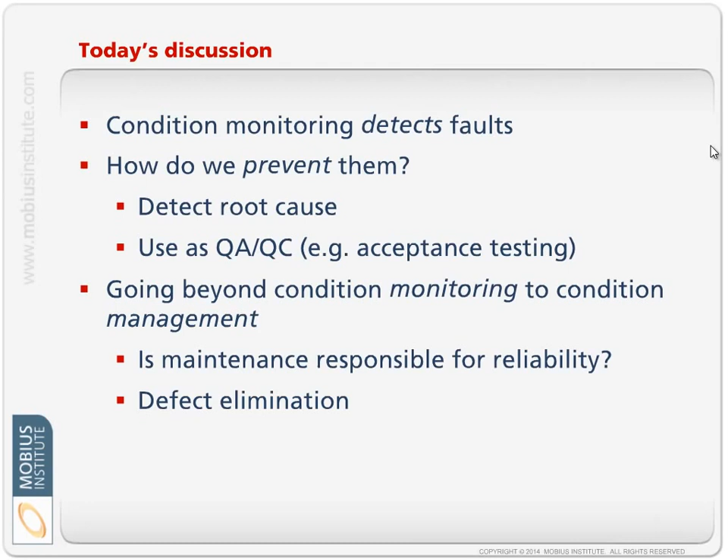In this presentation we're going to quickly summarize condition monitoring and its benefits in its traditional role, and then look at not only detecting faults but how we prevent them in the first place. We'll look at root cause failure analysis, using condition monitoring as a quality assurance and quality control process, and then we'll look at how we go beyond condition monitoring to condition management, and explore the topic of defect elimination.

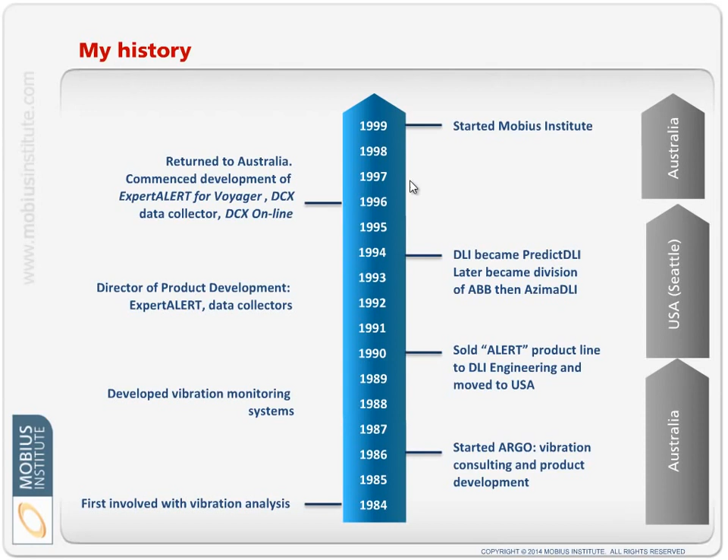Briefly, so you understand where I'm coming from, I've been involved with condition monitoring since 1984, in a variety of roles, from running my own company in Australia to working for a company that developed condition monitoring systems, to starting Mobius Institute, which provides training in condition monitoring. Our business has been going 15 years, and over those years we've developed various training courses related to condition monitoring and reliability improvement. More recently, we've taken our reliability improvement ideas and put them into a product.

The point I'm really trying to make is that over those 30 years, I've seen a lot of companies try to run successful condition monitoring programs, and a lot of companies really struggle to run their condition monitoring program as well as perhaps they should. They're not getting the returns they'd hoped from condition monitoring. We'll explore a couple of those points as we get through this presentation.

The other major observation through this time is that most people really focused on detecting faults and providing a warning that a machine was failing, but not necessarily focusing their attention on the area where they would get the greatest return on investment, and that is eliminating the root causes of those faults that they were detecting with their vibration analysis systems or infrared systems and so on.

There are lots of ways we can do that - traditional vibration analysis, ultrasound, thermography, and others. There are a lot of techniques we can use, and it depends on the type of equipment we're monitoring. In my discussions about condition monitoring, I would include inspections and observations as being an important part of condition monitoring, but some people might consider them just normal maintenance tasks.

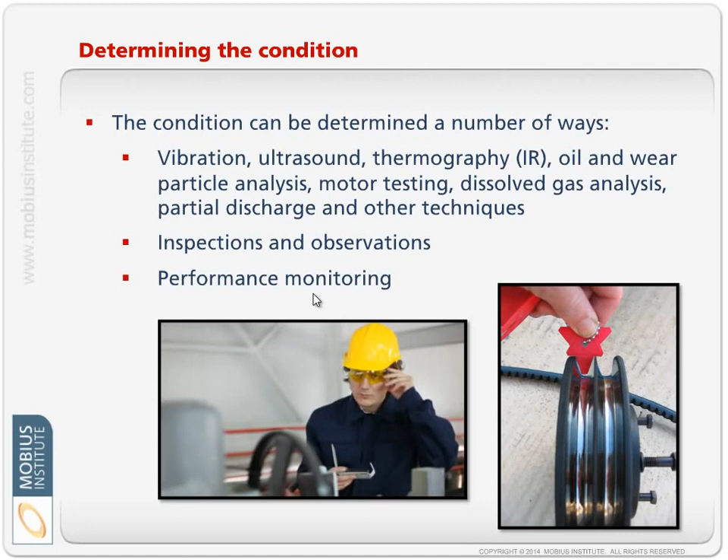But in general, if time is being spent to inspect a piece of equipment to determine its condition and the necessity for maintenance work, corrective actions or whatever, that to me is still basically condition monitoring. We're monitoring the condition so that we can react, and that's a key word here - we react if there's a problem detected. Performance monitoring certainly fits into that - if we can see that the pressure or flow is not adequate, that's a condition that needs to be remedied.

The basic principle behind condition monitoring is that we run for a certain period of time when the equipment is in its normal, healthy state. We could say it's running defect free, but let's just say the defects in the system, the inherent unreliability if I can put it that way, hasn't yet caused any faults to begin to develop.

At a certain point - this y-axis here is condition, and depending on different people's definitions, we might show that the condition has actually degraded a little up until this point. But at a certain point, we can say there is the ability to detect that the condition is degrading and that a fault has developed, albeit minor at that point. From that point on, which we call the P point in the PF interval, we can use these various technologies to detect that there's a problem.

Now, I've put ultrasound first. In some cases it would be the first to detect it if you had the ability to pick up, say, a lubrication problem.

But generally speaking, a bearing becoming loose or becoming hot and making sound, that is a late stage failure. Other technologies are going to pick it up earlier, but of course it depends on the failure mode and the type of equipment. What we really want to do is pick it up as early as possible.

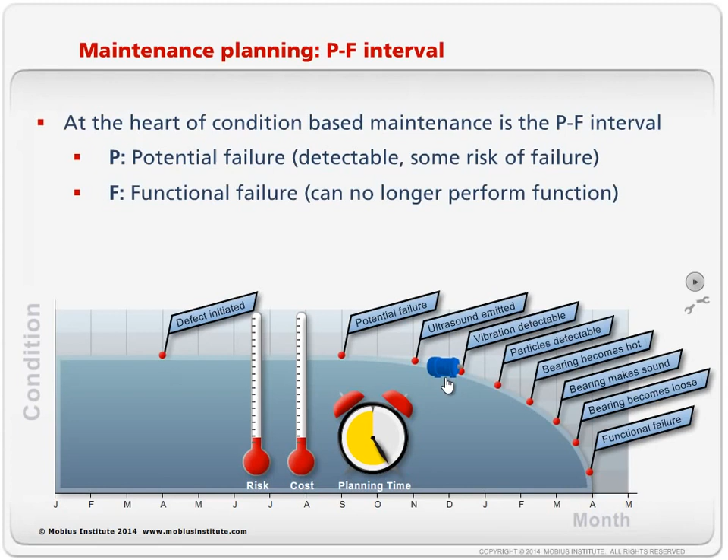The earlier we pick it up, the lower risks associated with the equipment and the lower cost of dealing with the problem. We have more time to plan it when it is convenient for us to deal with the failing bearing or whatever the problem is. But certainly the longer we leave it, we're increasing the risk of failure, we're increasing the costs to deal with the problem, and we're getting less time to plan.

But that's the core principle behind condition monitoring, and as long as we take enough measurements to at least plan to take 2 within this PF, F being the functional failure, if we plan to be taking 2 measurements in that period, then we should detect it and be able to respond. We may take more measurements during that period, and that gives us a higher likelihood of detecting it earlier. And then the other key is to use those technologies properly, but that's not really the point of this presentation.

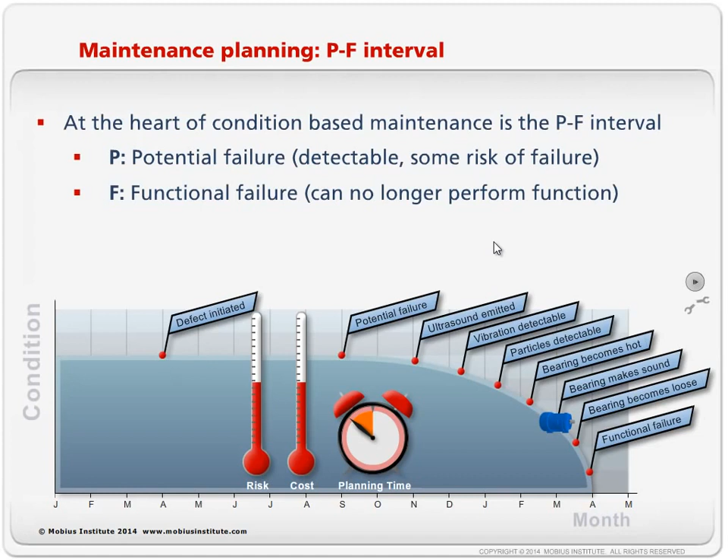So, what are we doing with condition monitoring? It is there for fault detection, not when it has catastrophically failed, of course. We're trying to get that early warning.

We can use that information to improve our maintenance planning. We can avoid secondary damage or collateral damage. If the bearing failed, maybe the shaft would be damaged as well, or a seal would be damaged, or there's secondary damage, and we get to avoid that.

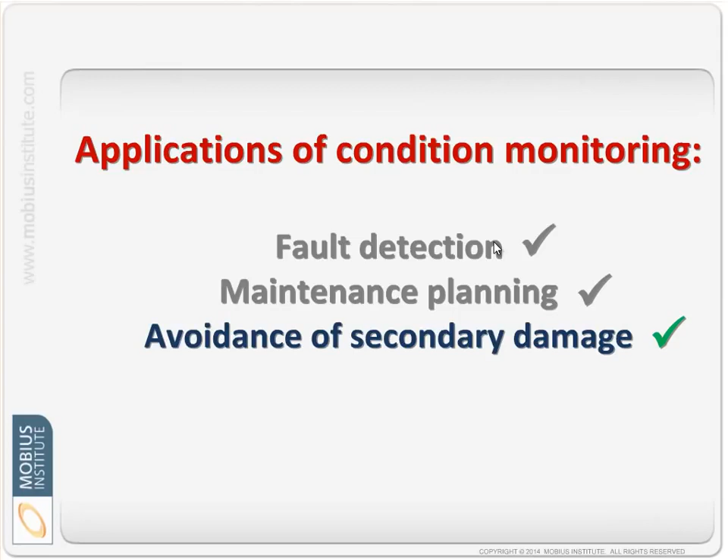If we're doing a good job, we can reduce our inventory of spares because we have more confidence that we will detect it early enough that we can perhaps order the spare that we need, the replacement piece of equipment that we need or part, and we know we have enough time to get that into our stores. So rather than having it on our shelves, which is costing us money, and there's the potential for that part to degrade over time, we get to save some money.

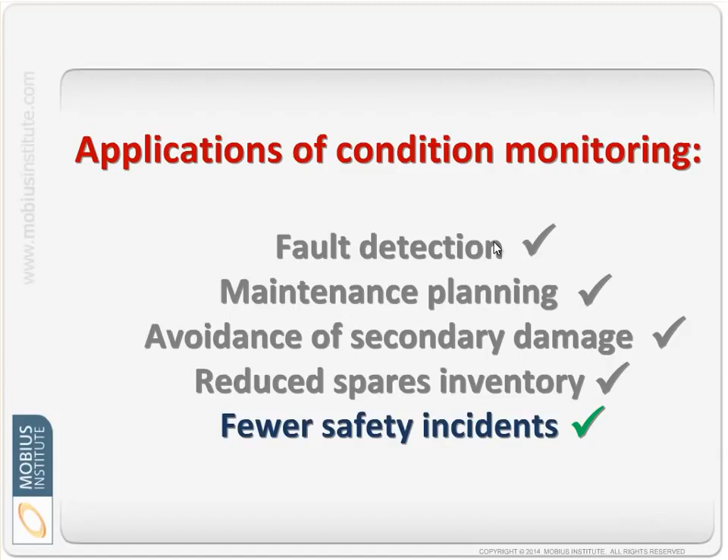And there are fewer safety incidents as well, both in terms of the equipment failing, which can have a ripple effect both from a safety and environmental point of view, but because we can plan our maintenance better, we'll have more time to plan the maintenance and we'll have a better idea of what's wrong with the machine. There's less time spent with the machine, and that reflects improved safety.

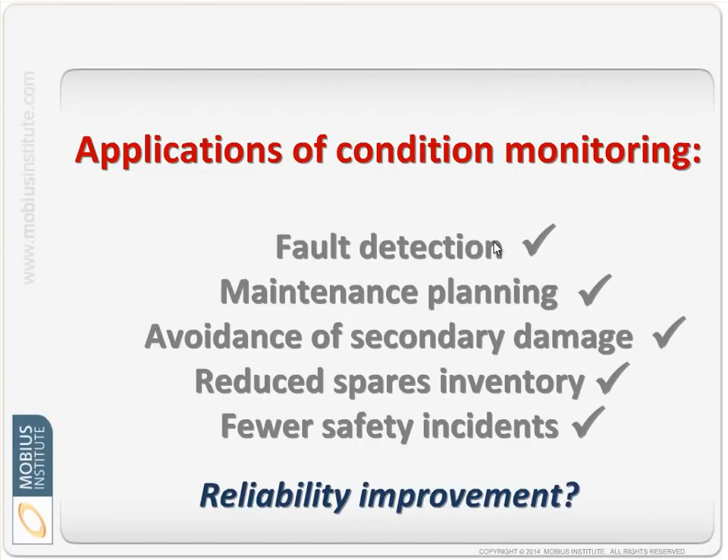But the question is, what does all of this have to do with reliability? Most people feel, well, condition monitoring, and I'll put the emphasis on the word monitoring, does it improve reliability? Well, certainly if you look at it from the point of view of, are we having as many failures as we used to? Is that your sole measure of reliability? Well, from that perspective, yes, we improve reliability of the plant.

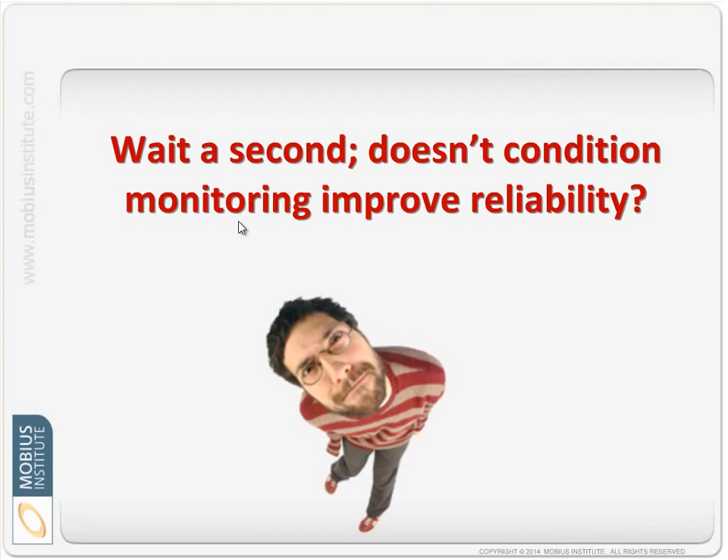We can make plans because we have a higher likelihood of having less downtime, greater availability, and so on. But are we improving reliability? What have we been discussing so far? We're really managing failure. We are detecting problems or fault conditions that for the most part just should not exist.

Okay, if you've been running the machine for the last 15 years and finally we detect a bearing fault or something, we say, hey, it did a good job. We're happy with this situation. But that's usually not the case. It's not 15 years later that we're detecting a problem.

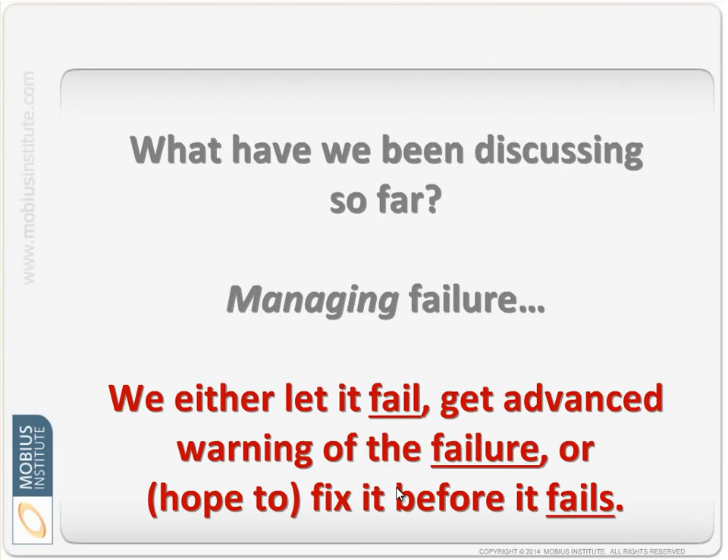It is much sooner. So we're either letting it fail, and we might choose to do that because of the criticality of the equipment or the demand on production. We get advanced warning of the failure, and we hope to fix it before it fails. But the emphasis is on failure. And so even though we like to talk about reactive maintenance, being separate to condition-based maintenance, it's pretty easy to actually call what we're doing reactive maintenance. Sorry, it's just that we're reacting earlier.

We perform our condition monitoring at the correct rate because we don't know when this fault is going to occur. It's still random failures, but if we're taking care of all the reasons why it would prematurely fail, then we'll get many years of service out of this piece of equipment. Finally, when it starts to fail because the bearing develops a spall or something else occurs, we use our condition monitoring techniques to detect the problem and plan it as early as possible. That's the key - we just want to keep it running in that defect-free mode as long as possible.

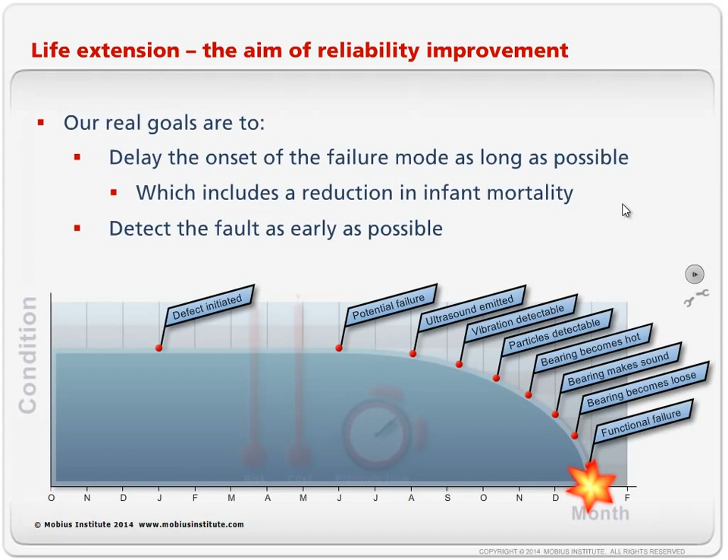With everything, there's an economic justification that's required. Are the steps required to improve its reliability, or avoid the degradation of its inherent reliability, justifiable? Can you justify the condition monitoring? These are important questions to ask. In the vast majority of situations, the answer will be yes, because those failures have a real ripple effect through the business in terms of safety, availability, maintenance costs, and so on.

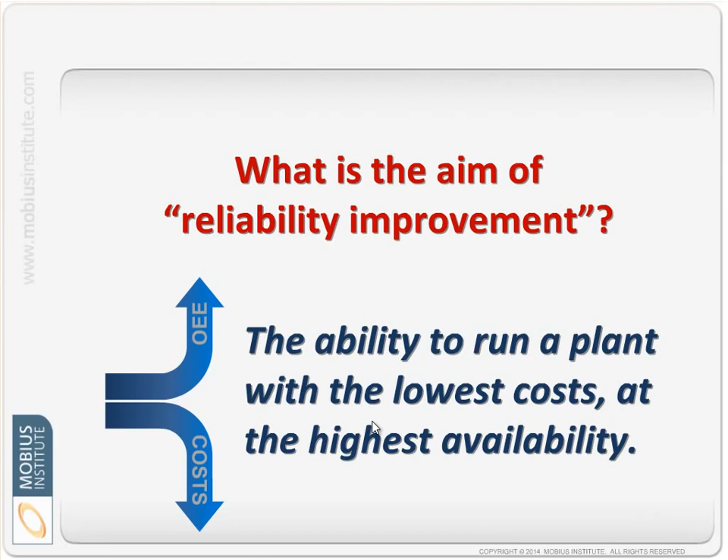Let's look at reliability improvement in more detail. When I talk about reliability improvement, there's a recognition that because of the equipment we purchased, we may not have designed and purchased the best equipment for the lowest life cycle costs, but it is what it is. What we don't want to do is degrade it further through our maintenance and operating practices. What we want to do is run our plant with the lowest costs possible - and no, that doesn't mean we're going to fire all the maintenance people. There are ways to reduce costs and increase the OEE. We're going to reduce our costs and have the highest availability possible, and we can in turn actually increase our plant capacity as well. More could be said, but that's really what I'm referring to when I talk about improving reliability.

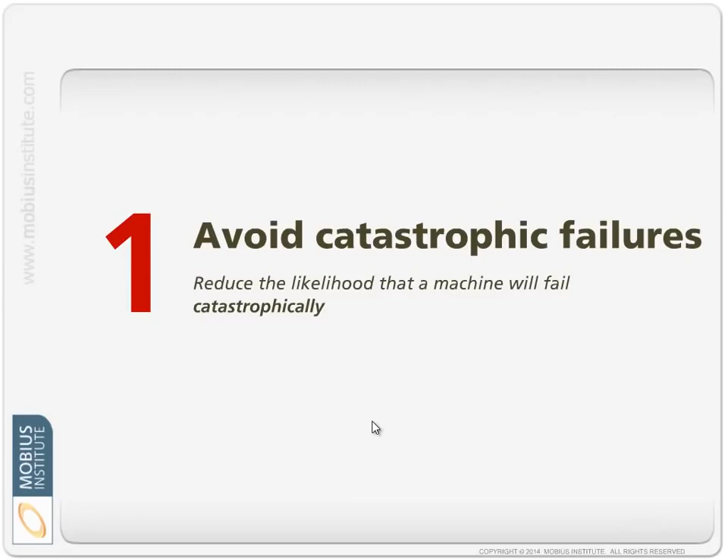So what is the condition monitoring group's role in reliability improvement? Well, as we've discussed, we're trying to avoid catastrophic failures, and that's a pretty simple one - that's the general thought when people think about condition monitoring, so we won't dwell on that any further.

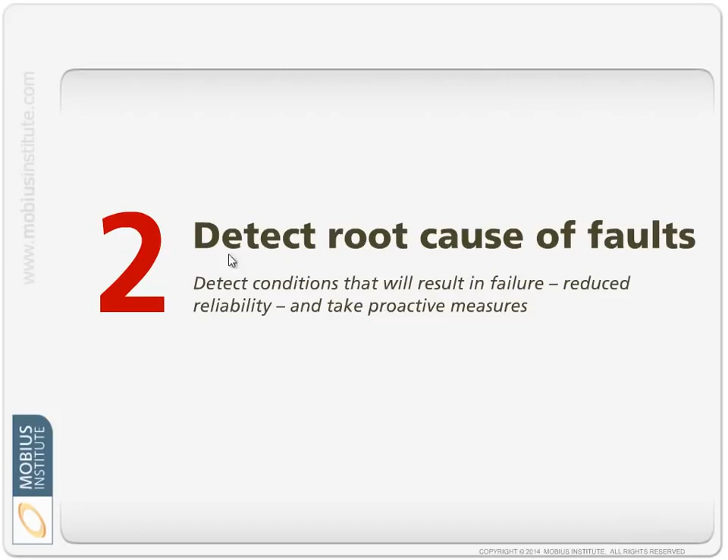But what we also want to do is use condition monitoring to detect the root causes of faults. Now, I'm not talking about performing root cause failure analysis - that is an important ingredient which we'll get to - but we want to detect the conditions that will result in failure, in reduced reliability, and take proactive measures.

So if you think about all these factors - unbalance, issues related to poor installation, misalignment, soft foot, resonances, loose foundations, poor lubrication, poor operating practices - all of those forces being applied to the machine. Poor lubricant increases the friction. Operating it incorrectly puts all kinds of loads on the bearings, seals, shaft, and so on. Unbalance, etc., all result in bearing failure, reduced efficiency, seal failure, leaks and contamination, potentially fire - a number of faults. So what we need to do from a condition monitoring point of view is detect when any of these things are going on.

Detect that the machine's out of balance, or that the bearings have been installed incorrectly, or that it wasn't aligned properly. If we detect those issues and then correct them, then we are less likely to detect bearing faults. That's the aim, and that's what the condition monitoring group can do.

Now, the reliability culture of the plant needs to change so that when the condition monitoring person says, 'I'm detecting unbalance here, and no, it's not that high that I'm concerned about the machine ripping itself apart,' it's not so high that it's affecting the process or upsetting people working in a nearby office or something like that.

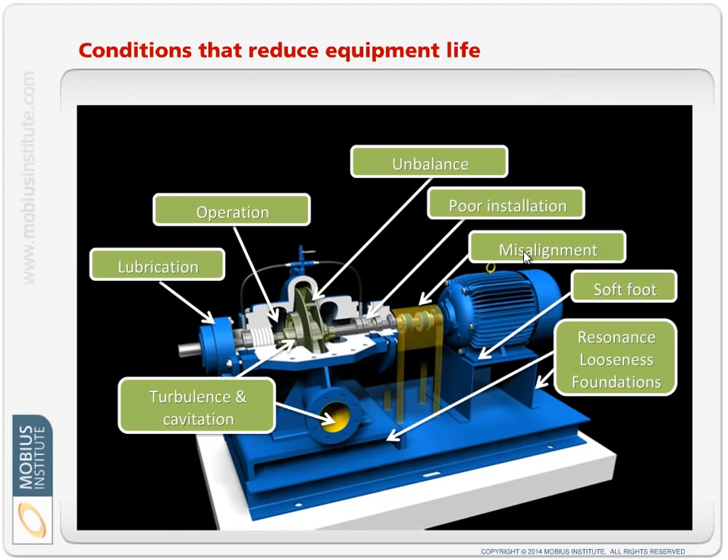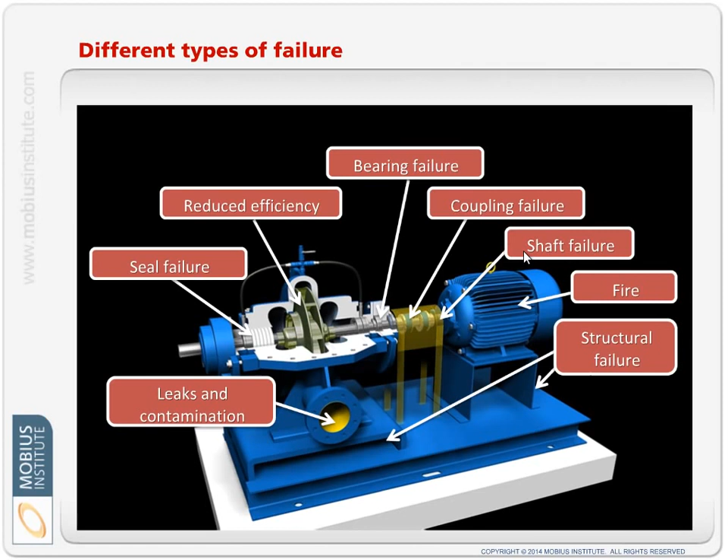We know that it will reduce the life of the equipment, and there's a lot we could say about that. But people need to take notice, to act and say we do not want to operate this machine in that state. If an opportunity presents itself, either because you have redundancy or there is a plant shutdown for another reason, and you can balance it or realign it or correct any of these issues, then you do.

There's even more we can do. For example, we can use oil analysis and wear particle analysis to check the lubricant health. We can see if it's contaminated, if it still has the correct levels of additives, if it's got the right viscosity. We can check that the bearings and gears have been properly lubricated, if there's looseness, resonance, unbalance, misalignment, bent shaft, etc. We can check if the bearings have been installed properly, if there's cavitation. All of these factors can be tested with condition monitoring, and if we correct those conditions, we will improve reliability.

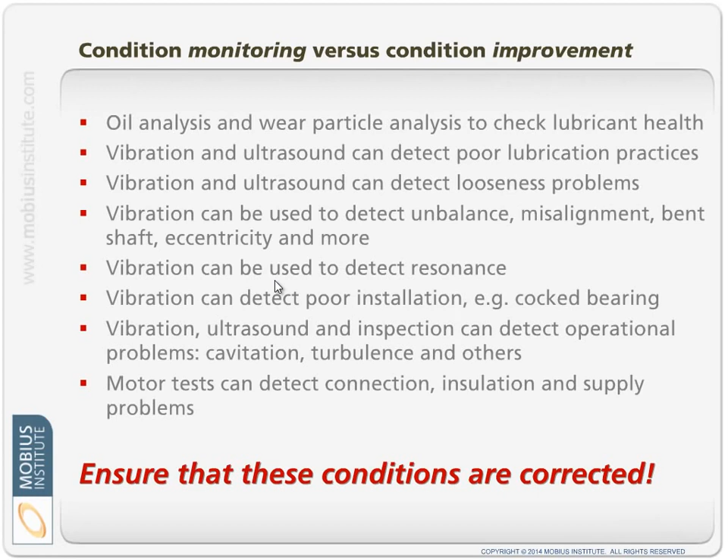Now, as I said before, we're not improving the inherent reliability. We're not redesigning the machine or replacing it, but we are not going to degrade it further with these sorts of issues. That is still reactive, but it's somewhat proactive. We're detecting the alignment problem and then we're going to do something about it.

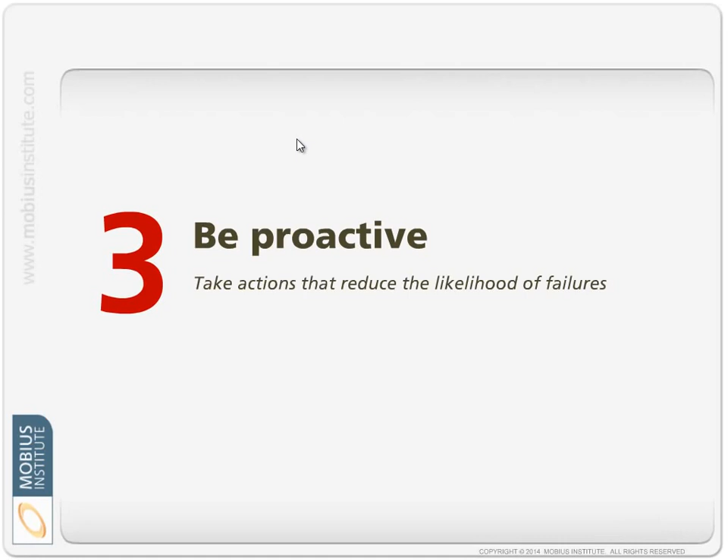But to be even more proactive, we want to reduce the likelihood of those problems even developing. So we are going to precision balance to G1.0. We're going to precision align the belts and shafts, perform precision lubrication, eliminate looseness, optimize tightness, minimize resonance, and improve our installation practices.

And the point is, rather than detecting the unbalance problem and then having to deal with it, if we have good balancing and alignment practices in the first place, if people have been properly trained, then these faults won't develop.

Now, with some processes we can't avoid it. There might be a build-up of material on a fan - it's part of the process, we can't avoid that. Okay, we look for the unbalance and we correct it, we clean the rotor, clean the fan blades and balance it if necessary. Some things will develop over time, but our condition monitoring can detect that and we can remedy it.

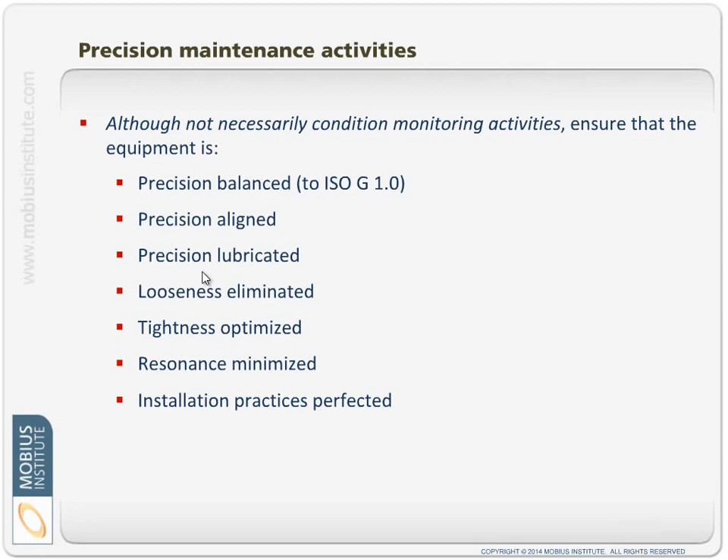But at all times we need to think back: was there a way to prevent this in the first place? So certainly with balancing, you can perform in situ balancing, and you can balance to a very high precision so that the unbalanced forces are minimized and therefore the bearings feel less of those forces. But what's important is if you are going to do shop balancing, or have a consultant come in and do in situ or in-place balancing, you must say to them, we want G1.0 and we want you to prove that's what you've achieved.

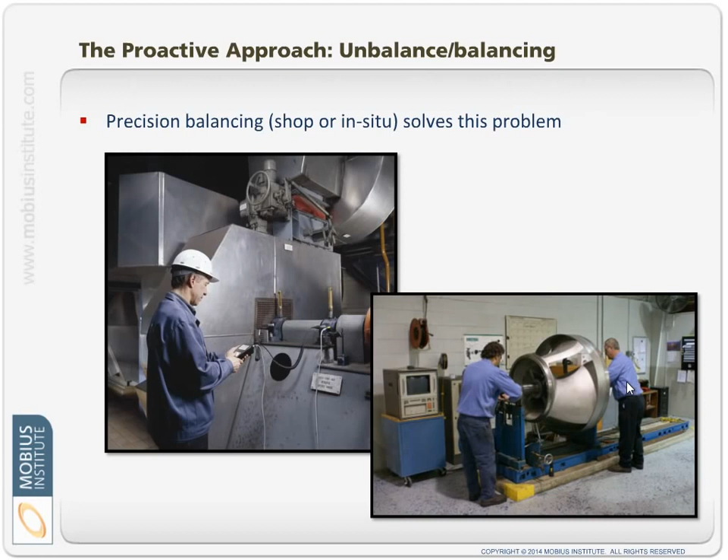If you get blank stares, then that's a bit of a worry, and that can be the case sometimes. People don't really appreciate what that means. There's a lot of misunderstandings about that, in fact. And then, you might balance the rotor, but you have to make sure that when the machine is reassembled and the keys are in place and so on, that it is still balanced. A lot of things to understand with that.

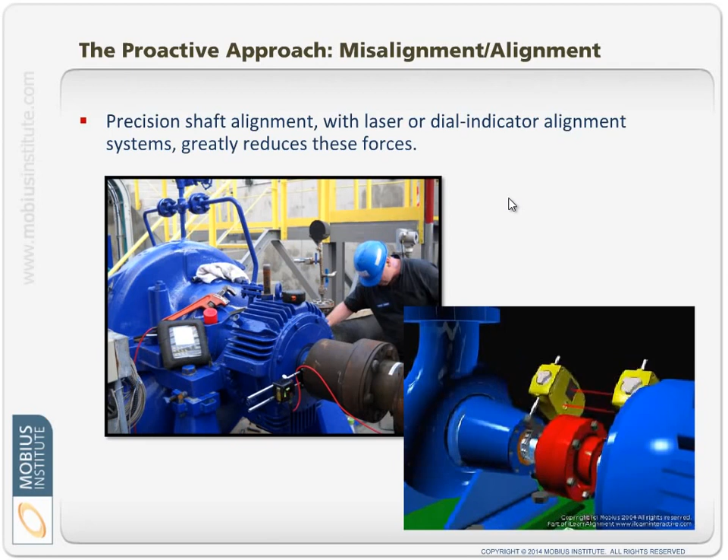Same with alignment. People think, oh well, I've got a laser alignment system, I am precision aligning. No, you're not. You're precision aligning only when you've defined what the tolerances are and you've achieved those tolerances. Just having laser beams involved does not mean precision alignment. Same with belt alignment - it's important that we align those belts properly.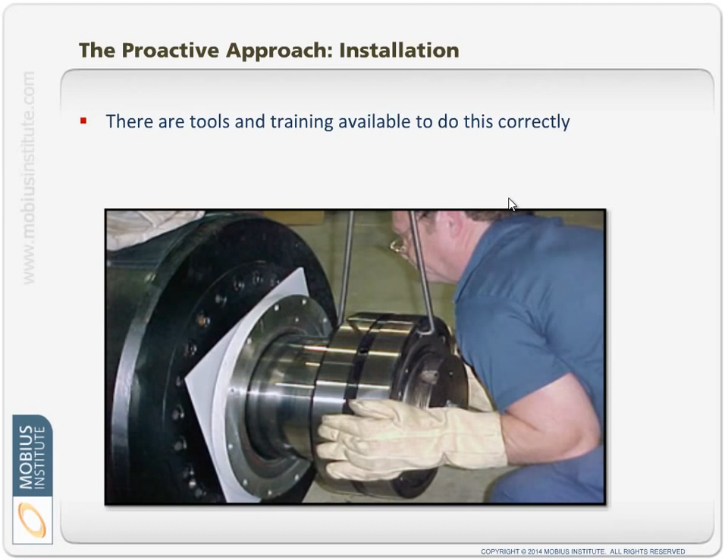Installing bearings, there's training you can receive to understand how to do that properly and how to remove the bearings properly. Generally speaking, people do want to do their jobs properly, but they haven't been trained to do it properly, or they haven't been given the tools to do it properly. That has to change. If the bearing is installed properly, there's a far higher likelihood that it will operate for a much longer time.

All of these topics we could talk about for a long time, especially lubrication - the way lubricants are stored, filtered and dispensed is all very important. Filtration, when contamination occurs if it's unavoidable, using desiccant breathers or other ways to reduce moisture getting into gearboxes and reservoirs, ensuring the correct lubricants are dispensed to the correct machines and reservoirs.

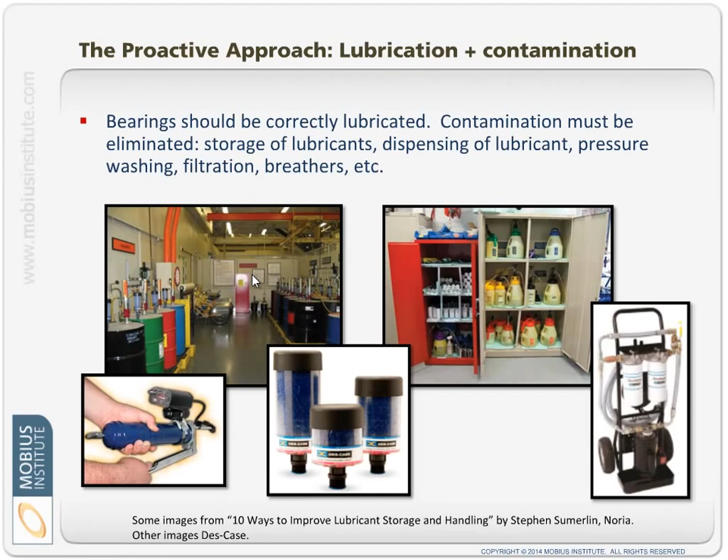The greasing process for bearings needs to be looked at carefully, and perhaps the use of ultrasound would help. All of these things, it's not rocket science. This may involve a little bit of money to go through this process, but it will pay dividends - it will absolutely pay dividends.

At this point we're eliminating faults. We are detecting signs like unbalance and so on that might lead to premature failure, and we're involved where possible in making sure that we balance properly and align properly and so on.

But there's one more thing you can do, and that's acceptance testing. There's an assumption in many industries that when you buy equipment - a new fan or a motor or whatever - that it is in perfect condition, in the ideal state for your plant. Unfortunately, that is a mistaken understanding. It is just not true.

Just so anyone's not recognizing anything here, this is just a stock standard image - I'm not talking about this particular company. The bottom line is that a lot of companies that make fans and pumps and so on don't necessarily understand these issues themselves. The engineering process used to design and construct them does not mean the reliability will be optimal.

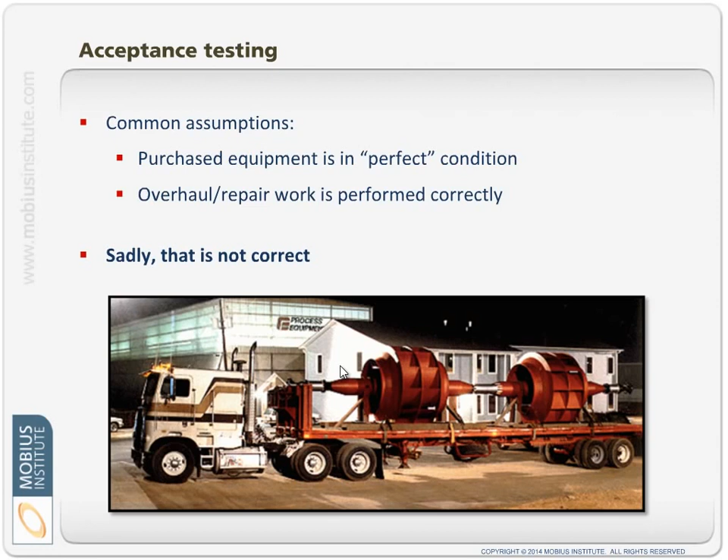You need to say in advance what you are aiming for. You need to set the bar higher so that from a design point of view, you design for maintainability and reliability, and the procurement process can only purchase spares and replacement equipment that meets your higher standards. Because if you make sure you're getting quality spares and new equipment in the door of your plant, you will have a much improved reliability picture as a result. It's really important to understand that.

You shouldn't assume that what you're buying is in good condition. Now, what we can do is not only set the specifications from a design point of view, but also the tests you will perform to prove it has met those requirements. In the simplest case, they can just be vibration readings - you can say you will not accept vibration readings over a certain level.

It should be spectrum based. You should be saying at these frequencies, these are the amplitudes - there should be no sign of any bearing frequencies, etc. We could talk much more about all of this, but the bottom line is you can set requirements. You can test motor rewinds and motors in general, you can test lubricants - there are all sorts of tests you can do.

Those tests could be performed by the vendor, or by you - that's an agreement you have to make in the first place. But you certainly have to define how the tests will be performed, the qualifications of the person performing them, and so on.

The idea is to reject equipment that does not meet your standards. Not that you have ill will towards your competitors, but someone's going to get that motor or fan you reject, because you're saying no, it is not coming into our plant. And like everything, you may pay a little extra, which is sometimes a bitter pill to swallow, but the life cycle costs will be dramatically lower - you will be purchasing equipment with a much better inherent reliability.

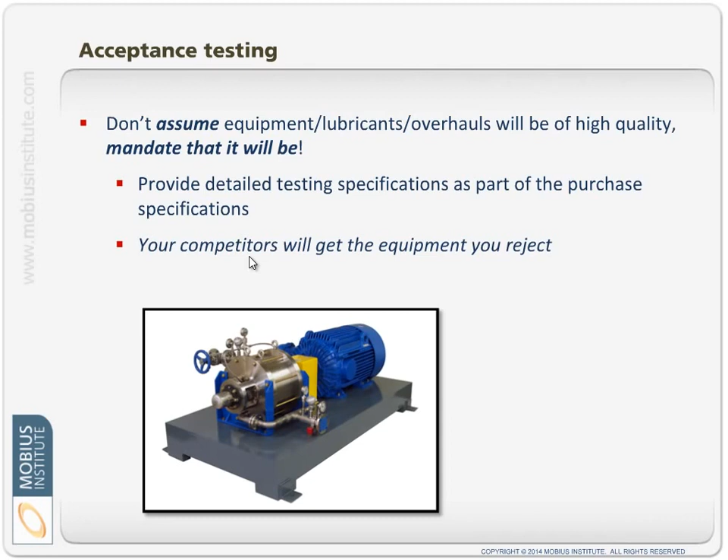So if we take good care of that equipment and have the right equipment in the first place, we will achieve all the goals of condition monitoring and improve reliability. So one challenge is, what should those standards be? How do you define what is acceptable?

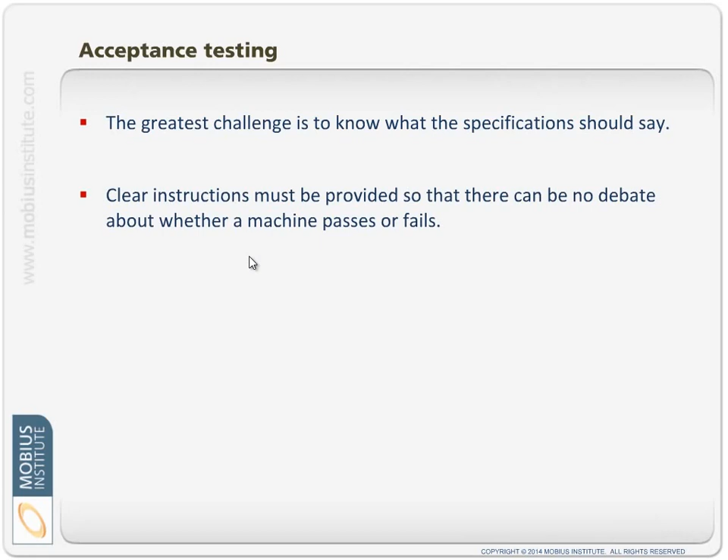There are a few approaches you can take. There are quite a few ISO standards specifically designed for acceptance testing. You will also find guidelines published for the automotive industry, the paper industry, and other industries.

And then there's also the question of your own industrial experience. If you've got a condition monitoring group that has been working for a while, they should be able to say what they would expect the vibration spectrum to look like when a piece of equipment is new. Now, it's not the alarm limits they would use to warn them if there was a problem. It's, we want lower vibration than that.

So there are certain things you can say, well, for this sort of size motor coupled to a pump that you're purchasing on a skid, you can say, well, I don't want to be able to detect resonance at all. I don't want to be able to detect any bearing faults. And you can go through that process, specify alarm limits, and just say, well, this is how the test should be performed, and if the vibration levels are any higher than that, then that's a problem and you won't accept it.

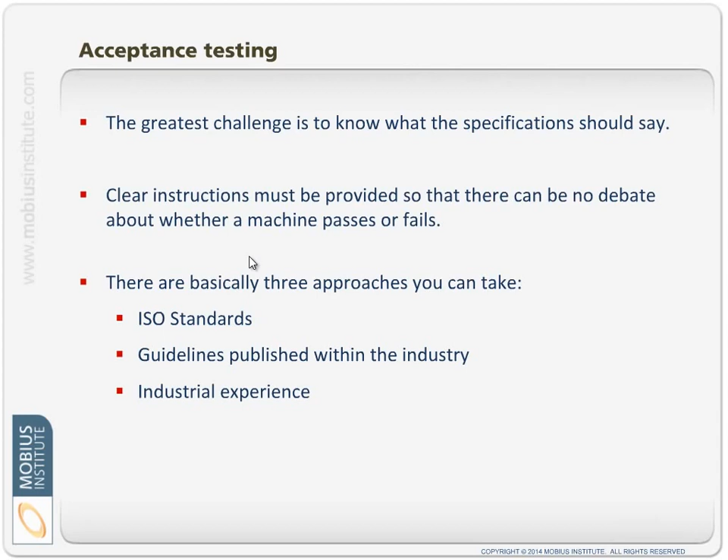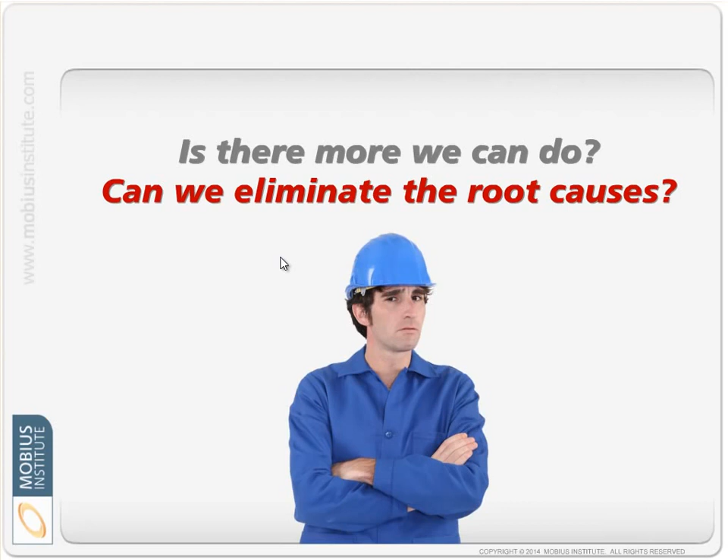There's a lot more we could say about this topic, but it is very important. And so, we can ask the question, is there more we can do? Can we do more to eliminate the root causes? Really, some of what we've been talking about, in fact quite a lot of it, I would bundle together into the area of defect elimination.

Now, it is true that we can look at the principles of RCM and how we design our maintenance program, and if we take an improved view of RCM and failure modes effects analysis, we can understand the failure modes and think about the condition monitoring tasks, and think about maybe improvements to designs, and think a little more broadly about what those root causes are.

But ultimately we want to stand way back and say, what can we do? We just talked a little bit about this. What can we do from a purchasing and design point of view to make sure that what comes into our company is the best thing for our business?

We have to look at the people who provide consulting services, motor rewinds, balance jobs and those sorts of overhauls, to make sure that they all understand what our requirements are for high levels of reliability. And also, how is the equipment being transported? How is the pump or the fan or whatever it is being transported? Because we can introduce problems there as well.

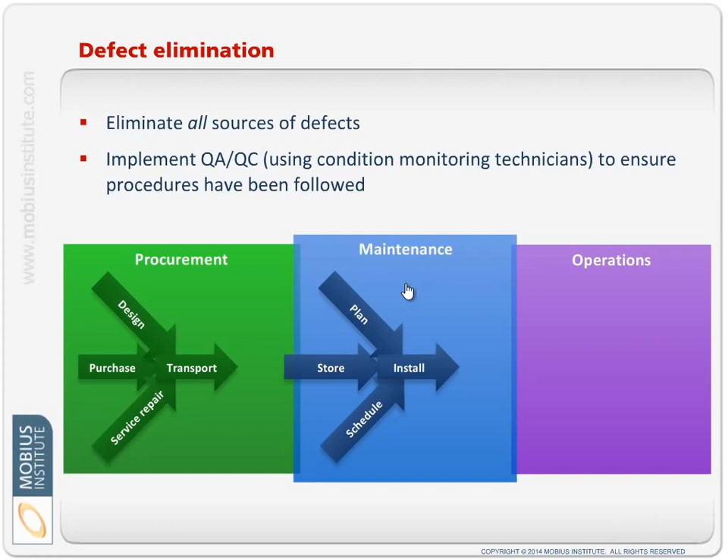The planning and scheduling process of maintenance has a large bearing on the reliability, and of course the way the equipment is installed also has a very large bearing on the reliability. So it's true, this part we can perhaps say it's maintenance's job to make sure that this work is done, and as I'll mention in a moment, there's more maintenance can do. But maintenance is not the root cause of our reliability problems.

Yes, those practices that we've discussed are a contributor, but we have to understand it's how we operate the equipment that has a very large bearing on its reliability. Now, it's going to change from industry to industry, but please don't sit there and think, oh, but not in our plant, that's not an issue. Make absolutely sure that's true before you make that assumption, because in many studies that is actually proven to be the largest source of reliability issues, the reasons why equipment fails prematurely.

But when we're operating the equipment, we do need to look at the lubrication process, and we need to look at all those things we talked about before - the alignment, balancing and elimination of resonance and all of that with our rotating equipment.

But we can't just aim to do all of these things and assume that it will therefore be done. We need to use that acceptance testing, the quality assurance, quality control. And again, that's where condition monitoring comes in. Condition monitoring comes in a few areas, but condition monitoring to do acceptance testing - and this is another form of acceptance testing - looking at how the equipment was installed and checking, are the bearings okay, is the lubrication okay, is it balanced, aligned, can I detect resonance, etc.

And then, of course, on an ongoing basis, we're going to keep on performing those tests to detect failures, but also to detect root causes of those failures - lubrication problems, operation problems, alignment, balancing, and so on. And if we can do these things, then we will improve reliability.

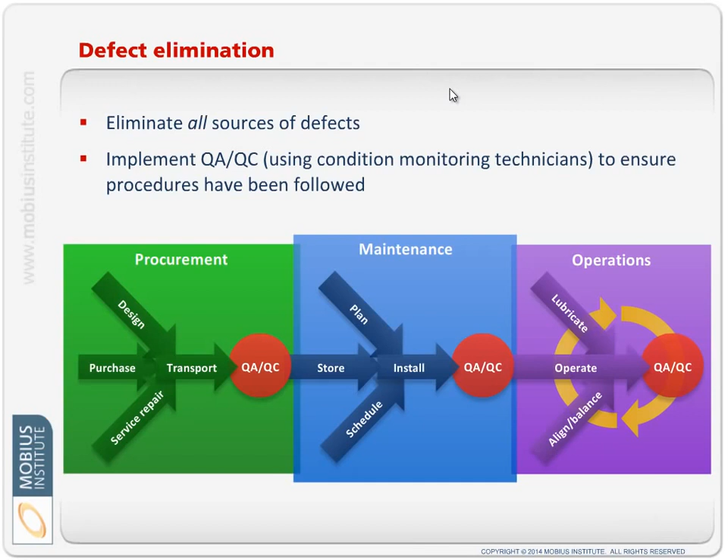Anyway, so wrapping it all up, there is no doubt that condition monitoring used to detect faults is vitally important, and if you're not doing it, you need to do it, and you will see a reduction in equipment failures.

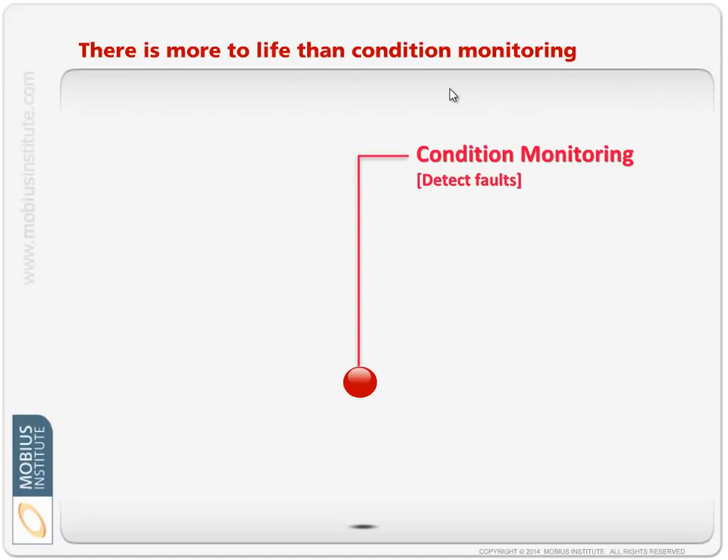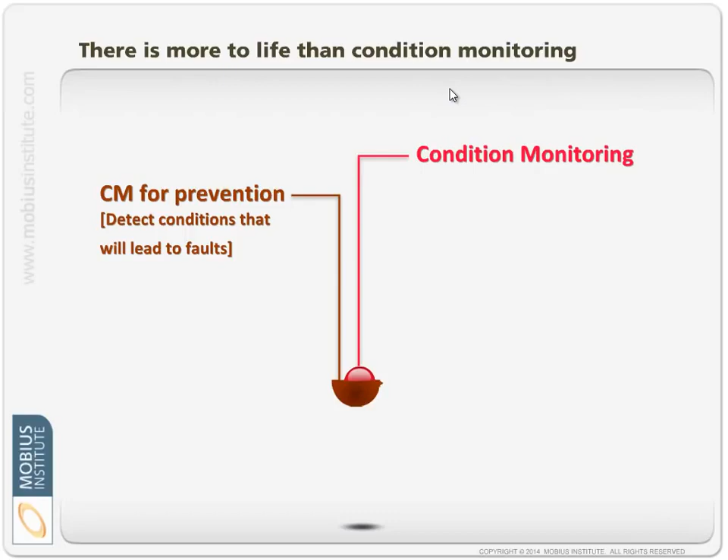But the next step is to say we want to prevent those failures by detecting the conditions that lead to it - the unbalance, misalignments and whatnot. And we have to take some action. Then we're going to use our condition monitoring skills in the quality assurance, quality control, the acceptance testing, testing equipment after it's been installed, and then ongoing condition monitoring.

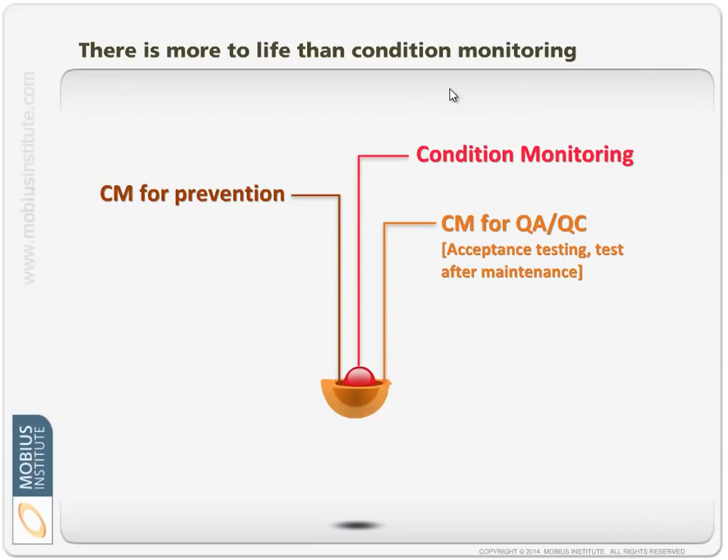But we have to look at things like the way we're operating the equipment, the lubrication and other care, cleaning it and so on. We have to see how we can engage with the operators to even perform some of these tasks - monitoring tasks and potentially lubrication tasks and other tasks that let them get more actively involved in the care of the equipment that they work with.

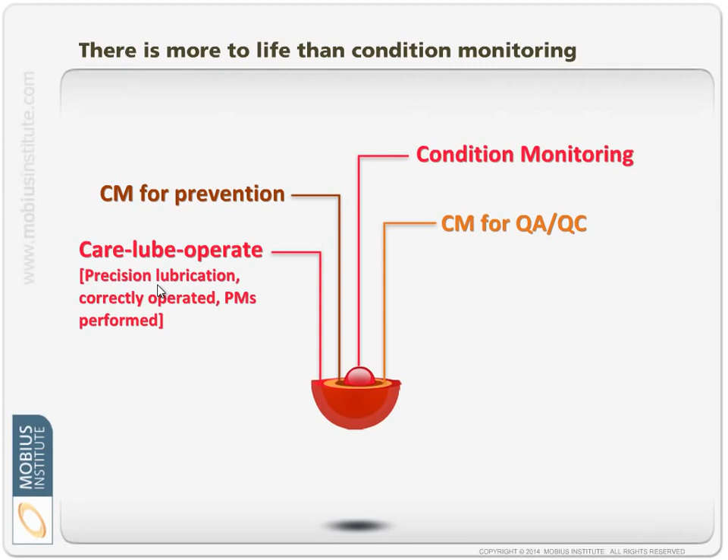Operator-driven reliability is generally what that's called.

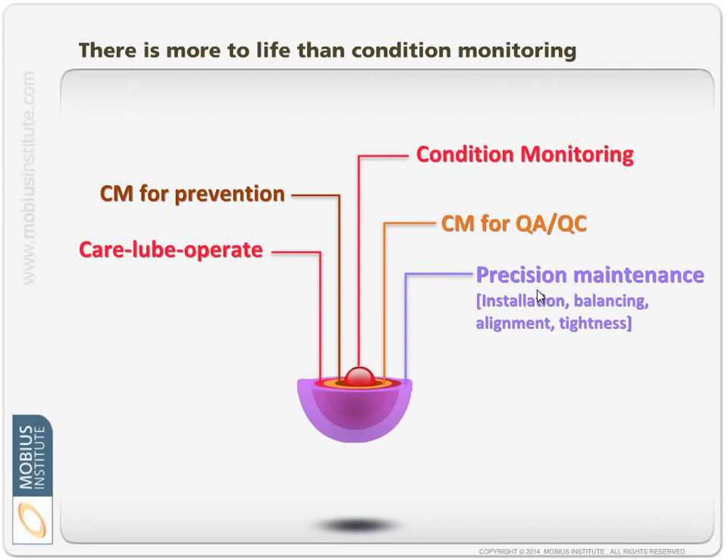But then we can get into the broader question of precision maintenance - the way equipment is installed, balancing, alignment, tightness, resonance elimination, lubrication and whatnot, how we're storing spares, what we store and how we store it, planning and scheduling - all leads to improved reliability and maintenance practices which improves reliability, a reduction in costs, fewer safety incidences.

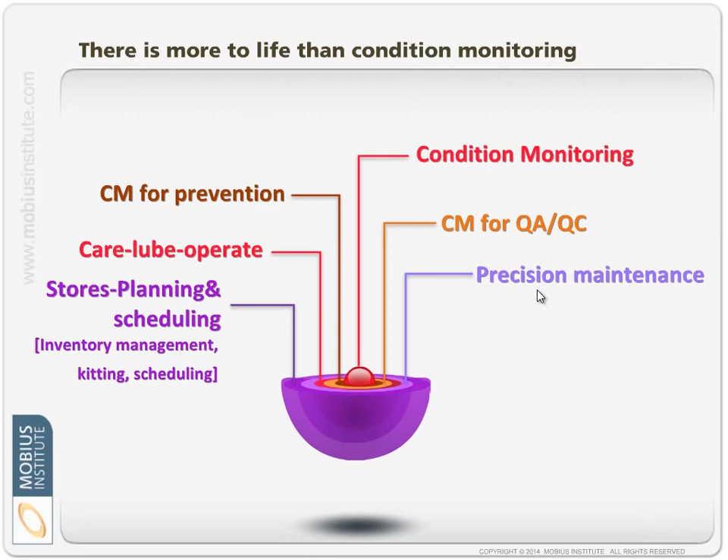It's obviously important. I mentioned already the transportation and storage. We can cause false Brinelling, we can cause corrosion, there's other factors there.

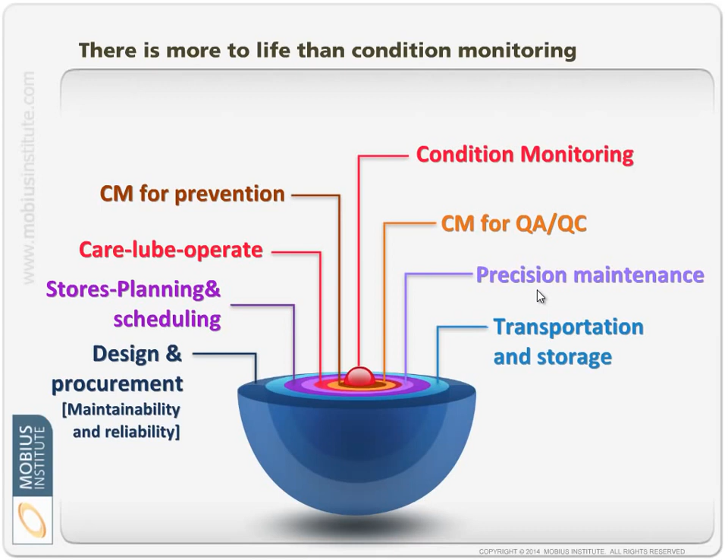And finally, we stop anything from getting into the plant by designing for maintenance, maintainability and reliability, and purchasing for maintainability and reliability and reduced energy consumption. We set the bar a bit higher so that yes, they can save money, but anything they purchase will give us the lowest life cycle costs. We don't save a little bit on that front end and then pay for it later with increased energy costs or repeated failures of that equipment.